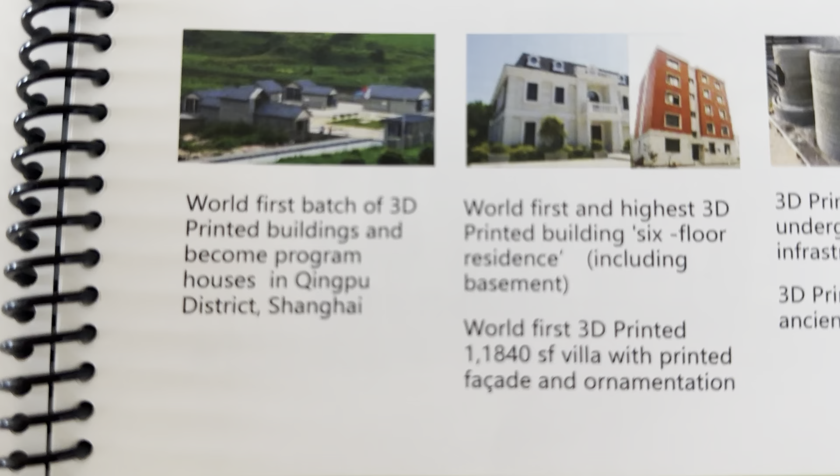Here's a brief introduction to the milestones of Winsun 3D printing projects: the world's first batch of 3D printed buildings, which became program houses in Qingpu District, Shanghai, and the world's first and highest 3D printed building, a 6-floor residence including a basement.

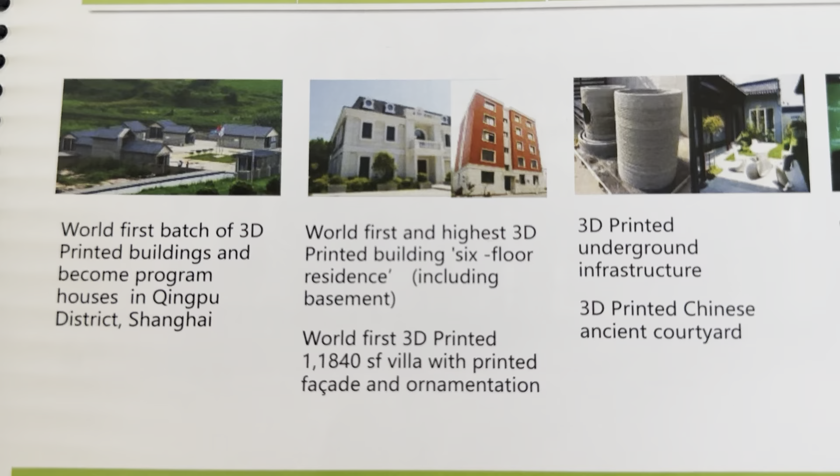World's first 3D printed 11,840 square foot villa with printed facade and ornamentation. Also, 3D printed underground infrastructure, and a 3D printed Chinese ancient courtyard.

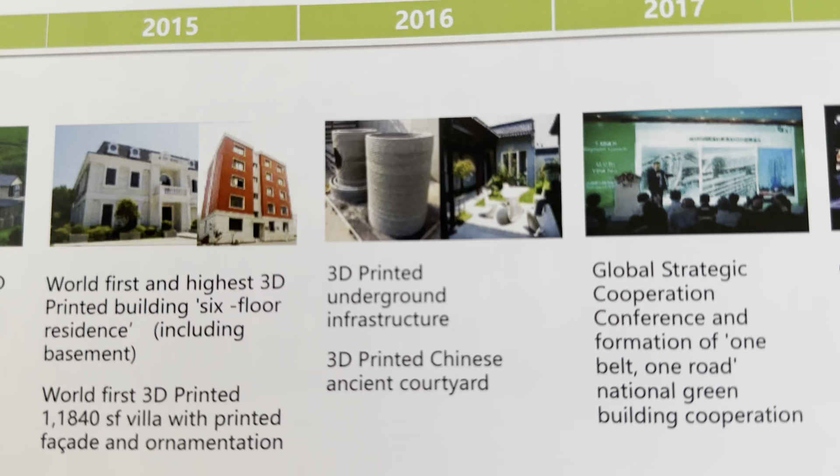In 2017, the Global Strategic Cooperation Conference and formation of One Belt, One Road National Green Building Cooperation. In 2018, Global 3D Printed Standards Shanghai.

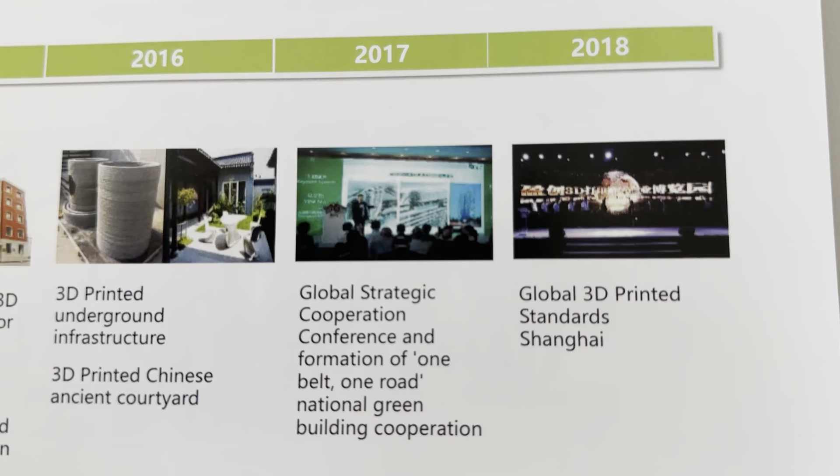In 2019, the 3D Printed Architecture International Standards League was established. Winsun's worldwide operations as of 2023 span 14 countries.

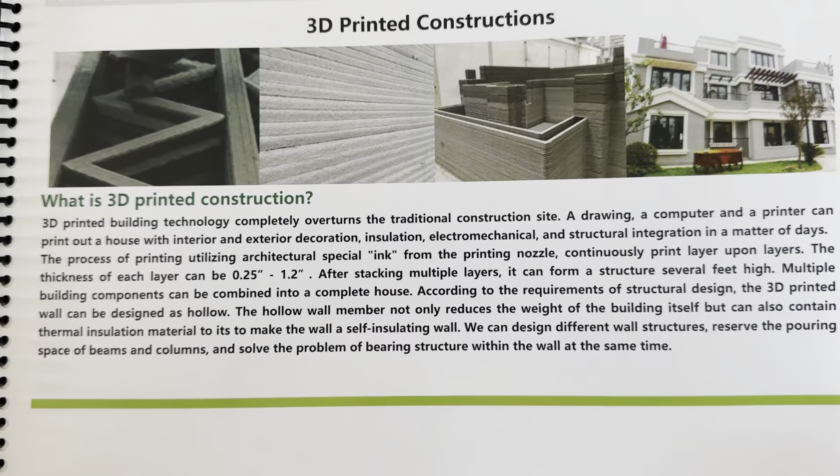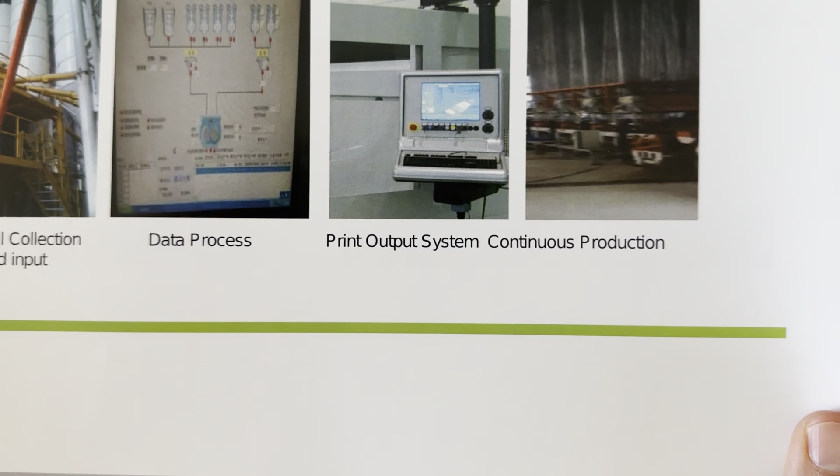Here are the 3D printed constructions. This is the first generation. This was the first to deploy a continuous 3D printer. And this is the second generation equipment.

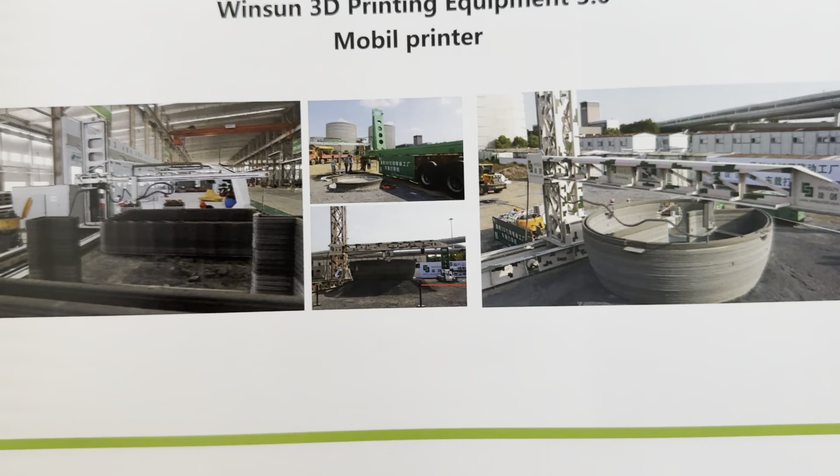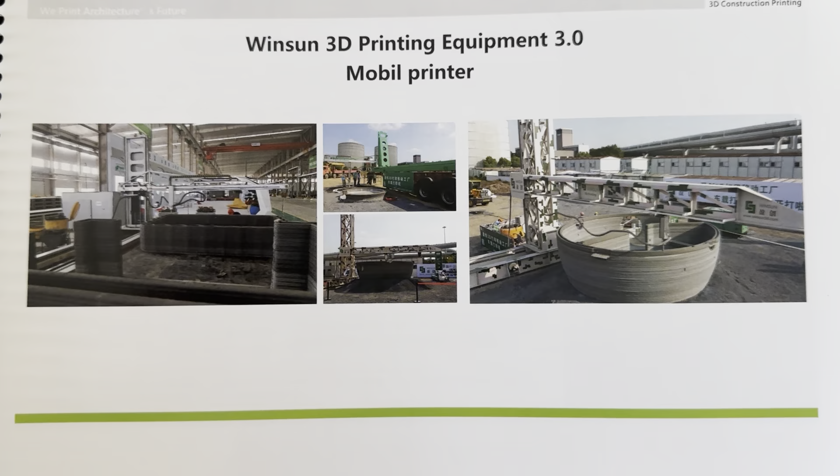The mobile printer, third generation of Winsun's 3D printing equipment. We actually have a fourth generation that can close and set up in each 30 minutes, and currently in the United States we have 6 of them.

We have 3 projects in Hesperia City currently being approved for 3D printing. One is a 7-unit apartment, 2-level building, and the other is a 9-unit single-family home.

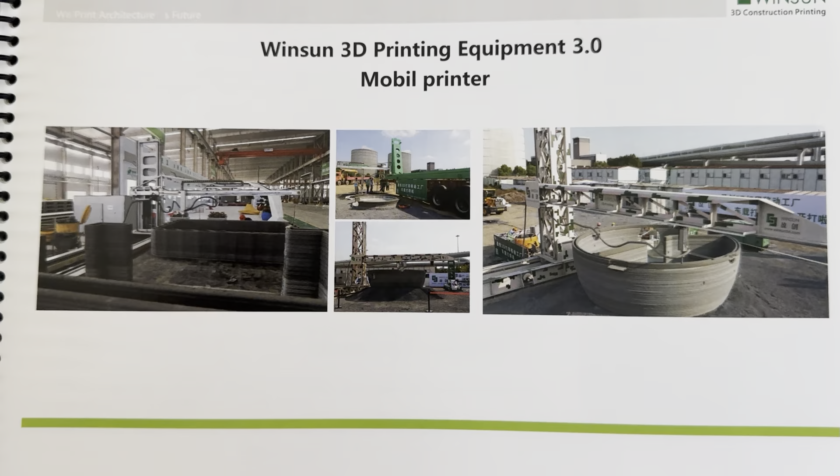Then there are the mini factories. Our 9th generation can print 10 stories and up, though it's not here yet. Winsun's 3D printing building is safe and reliable.

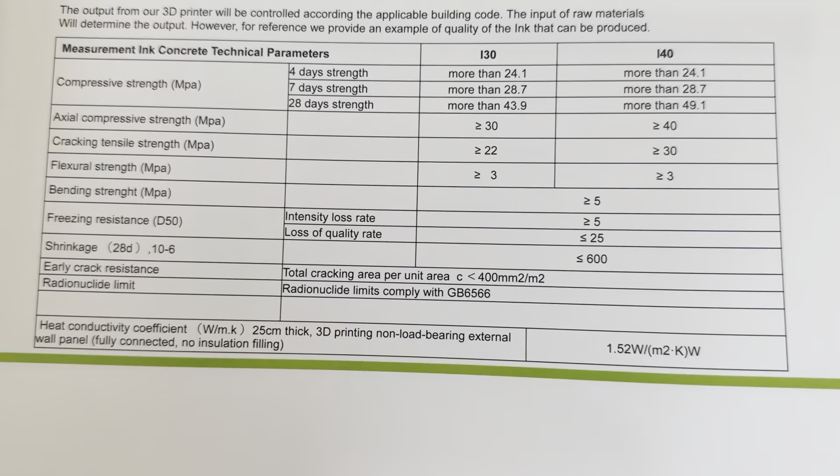It has been proven, and here are the standards.

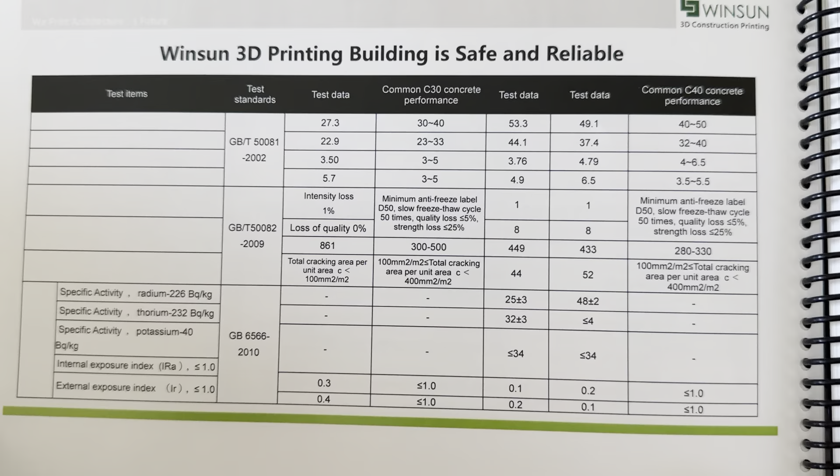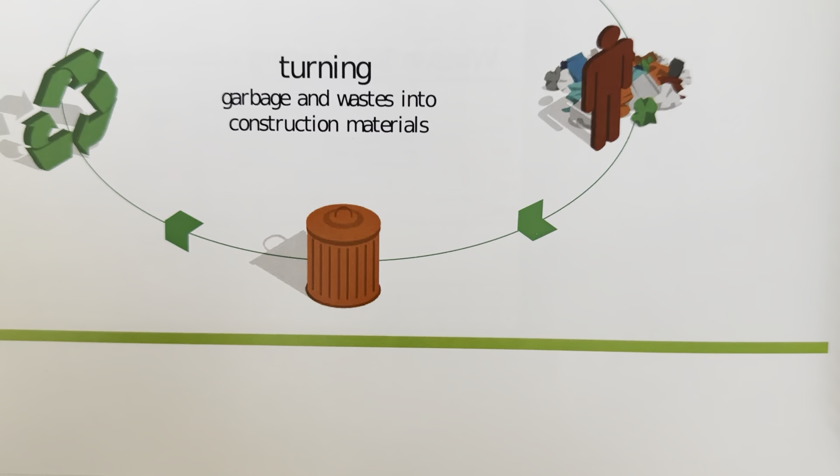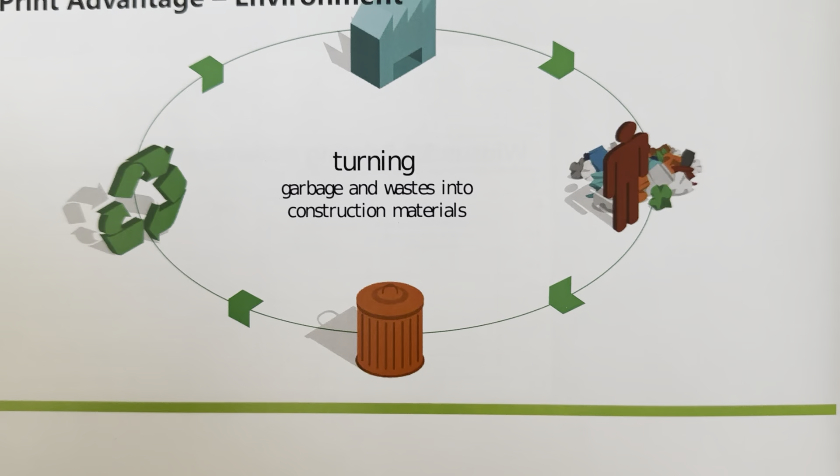The advantages of 3D printing for buildings: first is the environmental benefit. It turns garbage and waste into construction materials, recycling for a greener future—a building solution that turns construction waste and city garbage into an important part of the raw material of buildings.

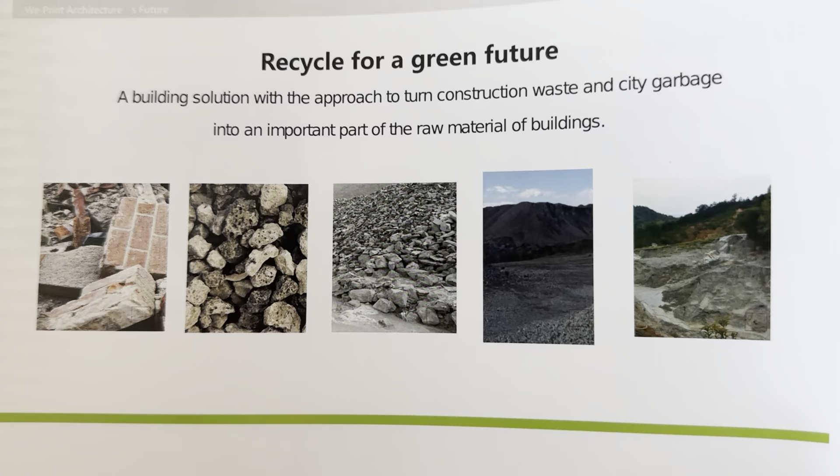Second is form-free construction. You know how in the traditional way we use wood framing? With 3D printing, we can eliminate that. It's custom-finished, and we can create any custom shape.

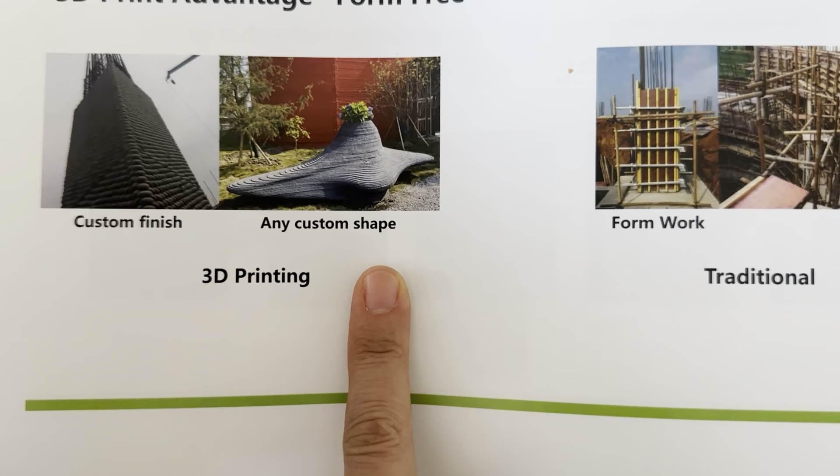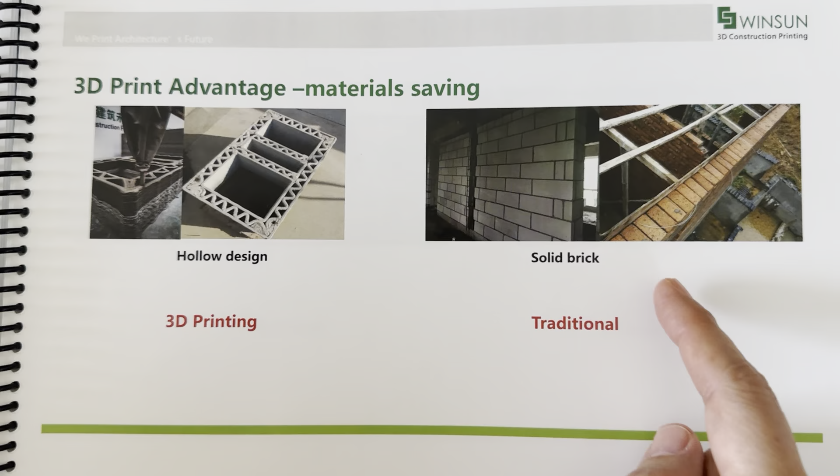The third advantage is material savings. Traditionally, if we use solid brick or poured concrete, it's solid. But with 3D printing, it's a hollow design.

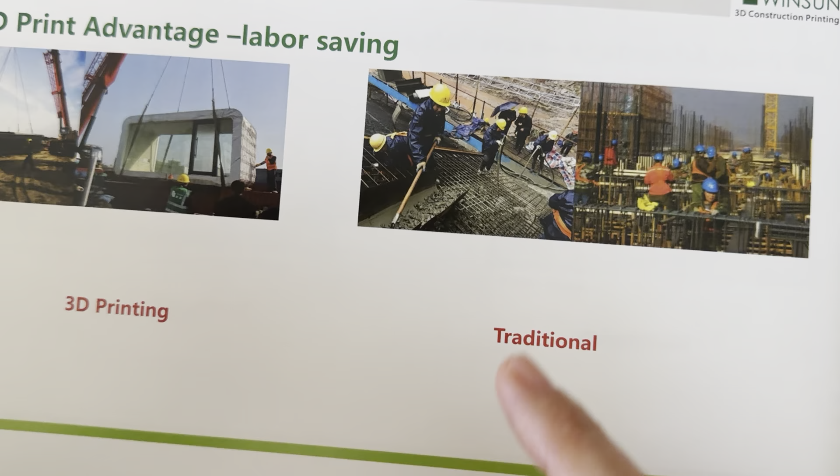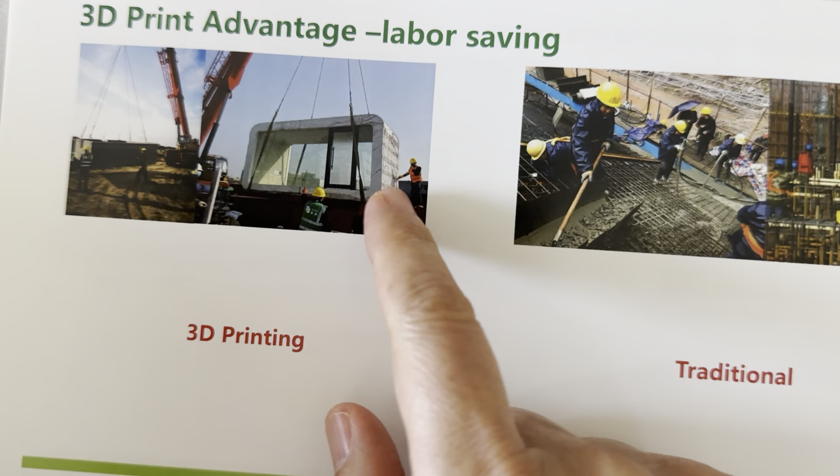And labor saving. It takes many workers for a big project to do the wood framing and pour the concrete. But with 3D printing, just one person controls the remote, with a few construction workers to watch the drop down.

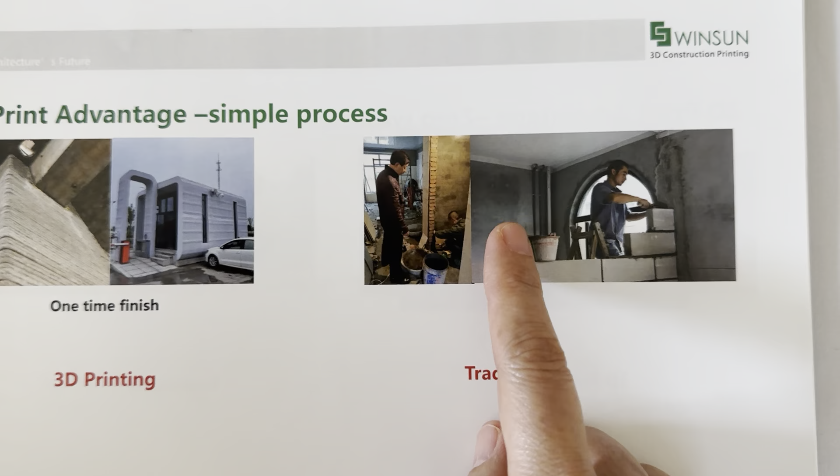3D printed advantage number 5 is simple process. Traditionally, we have people doing the work, but with 3D, it's one-time finish.

Number 6 is zero waste. 3D printing can turn any waste into building material. Traditionally, after we use a building and demolish it, the waste goes to the environment, but not with 3D. And it's time savings.

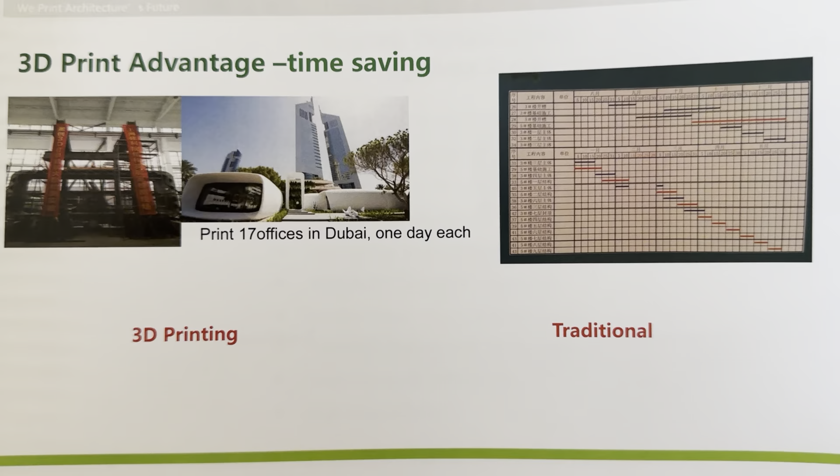We printed 17 offices in Dubai, 1 day each, so 17 days we finished. Traditionally, you have all these long timelines.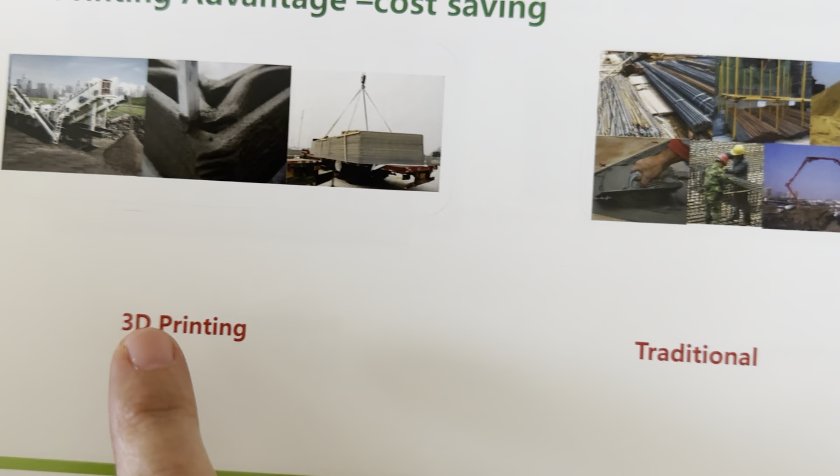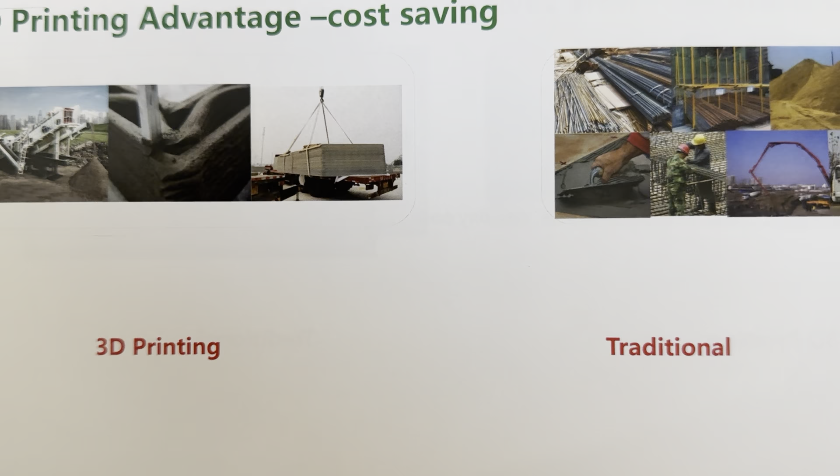Last but not least is cost savings. Traditionally, you have all this material cost, but with 3D, it's really simple. For a 1,000 square foot home, an ADU, 1 floor, it costs you less than $25,000 for the building structure, including material and labor, and it takes 1 day.

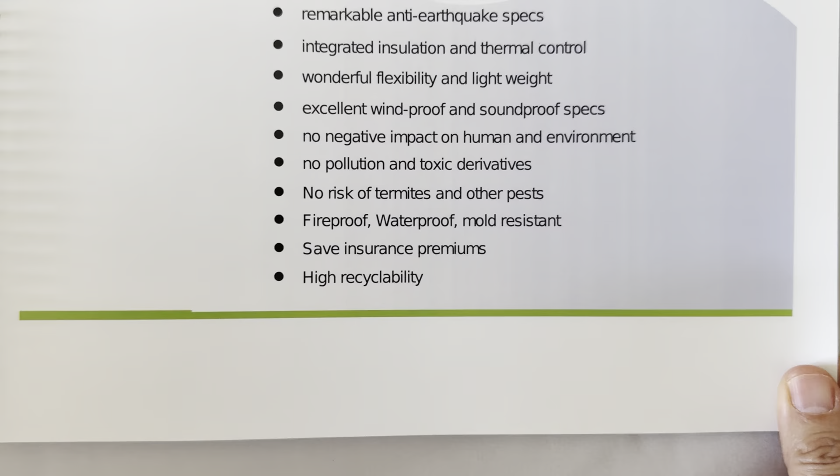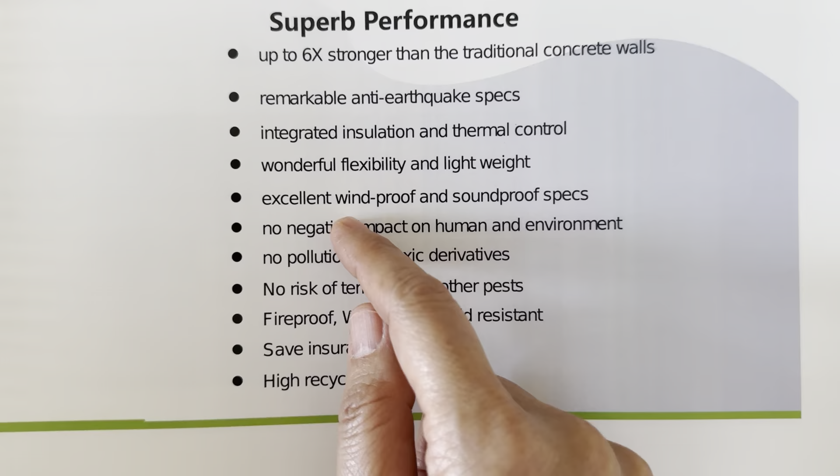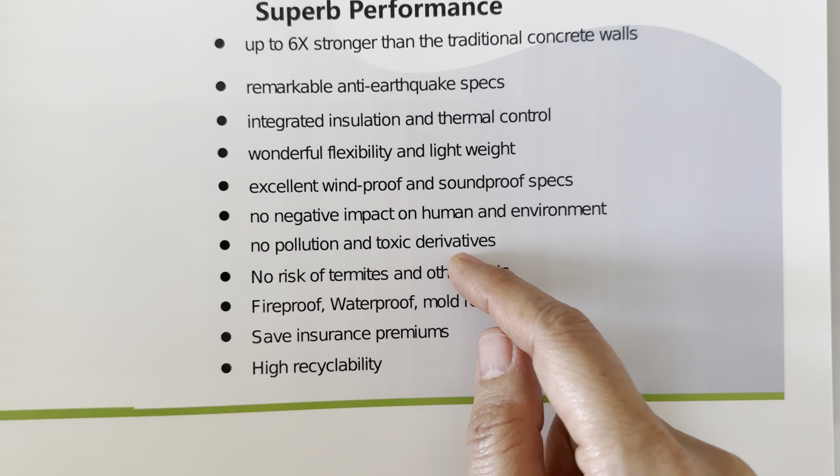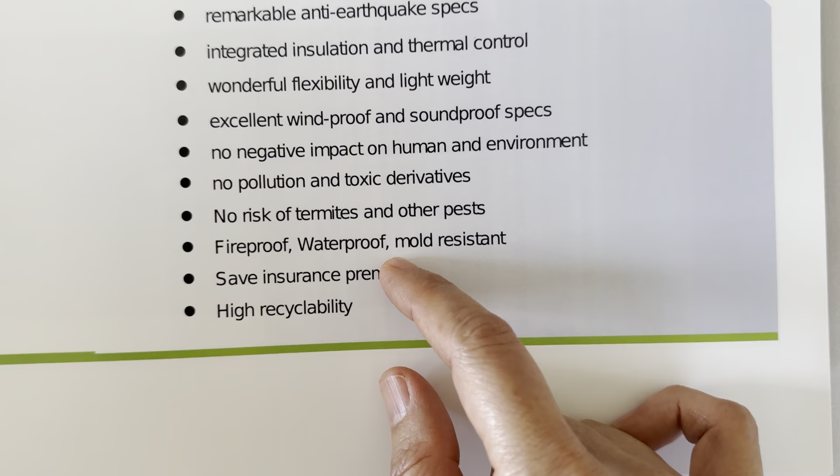So superb performance - it's up to 6 times stronger than traditional concrete walls. Remarkably anti-earthquake specs, integrated insulation and thermal control, wonderful flexibility and lightweight, excellent windproof and soundproof specs, no negative impact on humans and environment, no pollution and toxic derivatives, no risk of termites and other pests, fireproof, waterproof, mold resistant, save insurance premiums especially in California, and high recyclability.

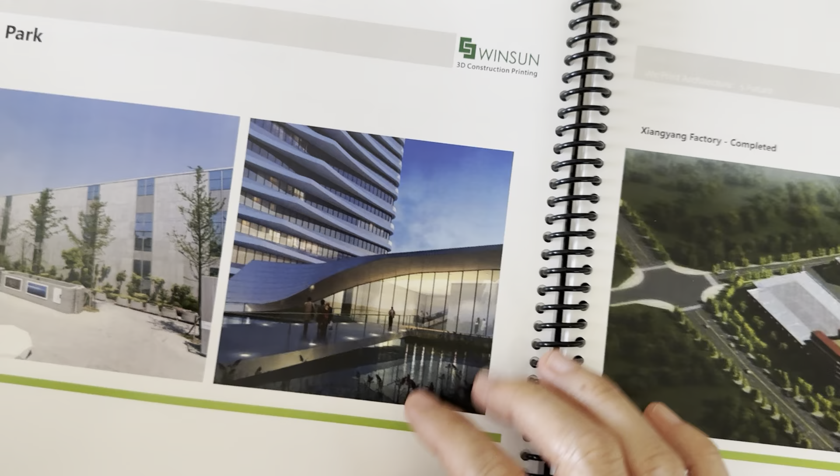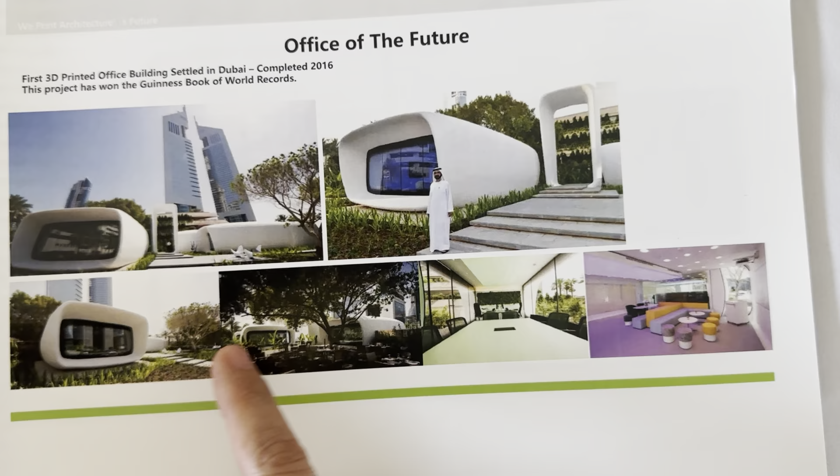Then we have the industrial park in Suzhou factory that's completed. And the Xiangyang factory, Winsun's industrial park, also completed. This is a Winsun printed park, also completed. And the Office of the Future in Dubai with Prime Minister Sheikh Mohammed in front of the 3D printed offices - we printed 17 of them in 17 days.

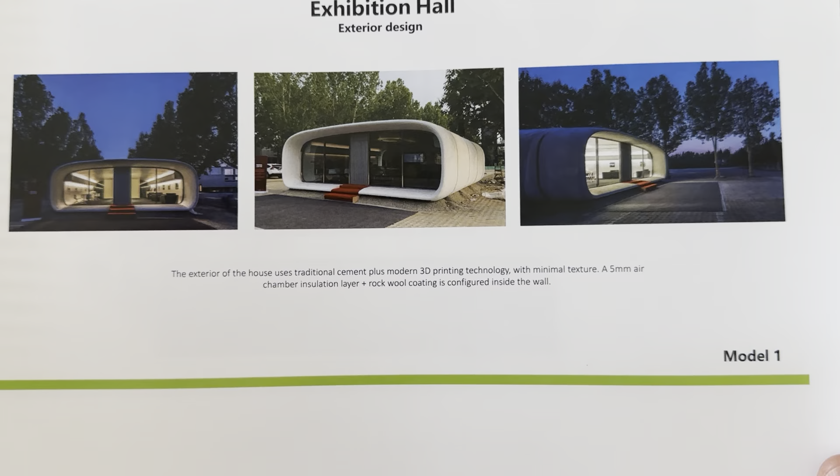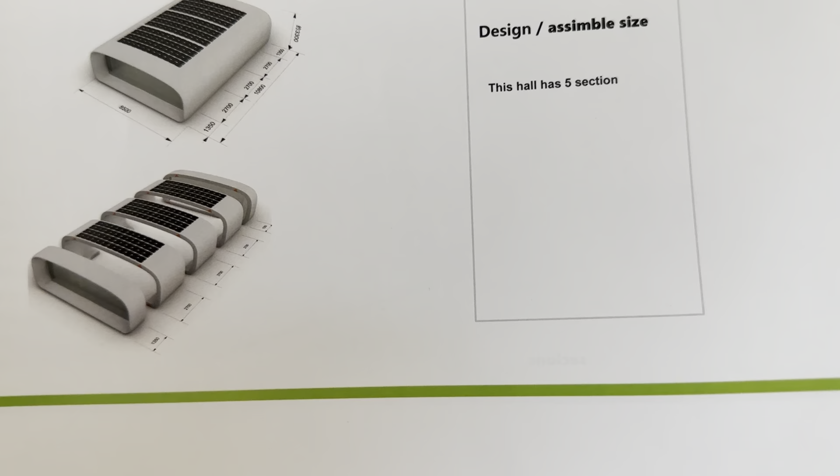And this is the dimension and how it was built, how it was printed. And the exhibition halls. Here you go. And solar panels on the top. Right here.

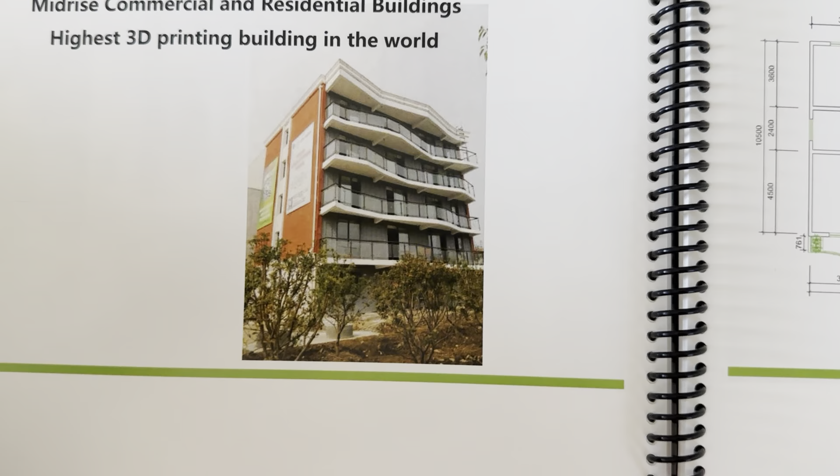And this mid-rise commercial and residential building, the highest 3D printed building in the world. And here are the floor plans.

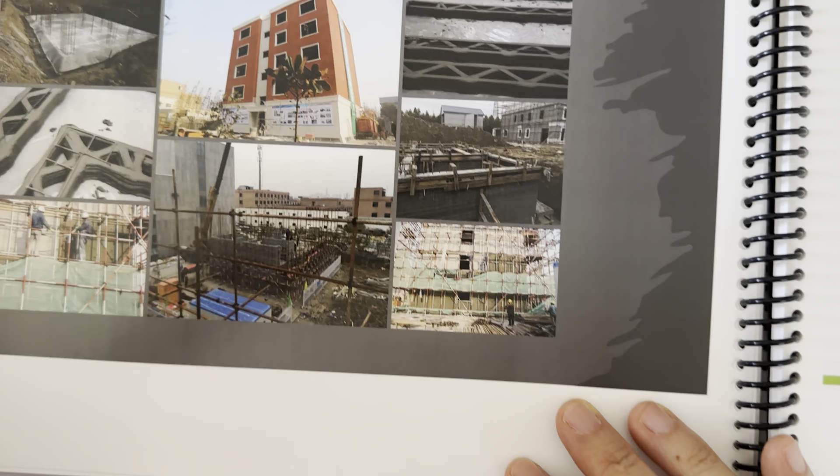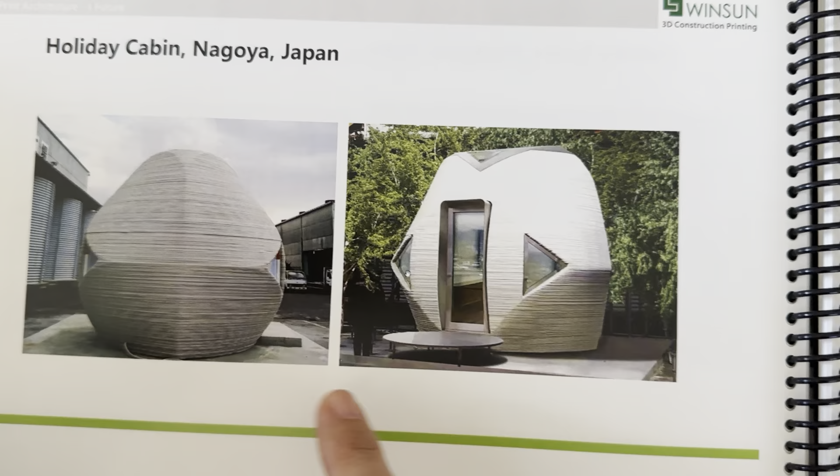Holiday cabin in Shanghai, China. We did this in Japan too - holiday cabins in Nagoya, Japan, and another one in Nagoya, Japan.

And in 2015, Milan World Expo, Winsun printed a KIP pavilion and UN garden. It's absolutely beautiful.

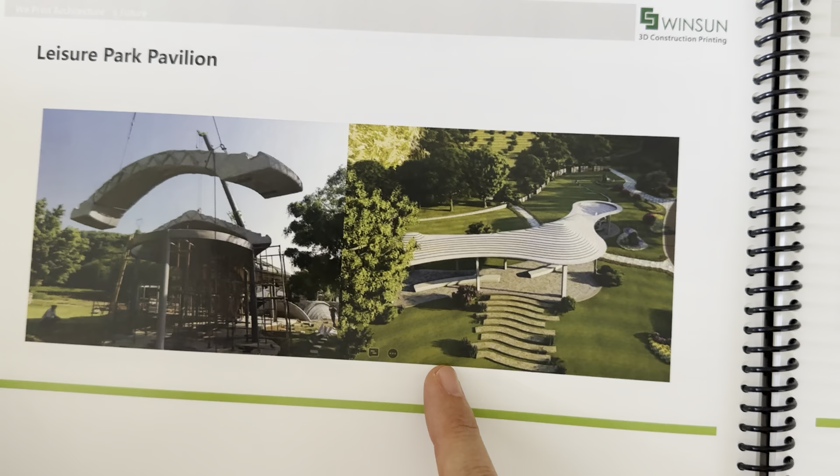Unbelievable - an APEC Summit wall system. We also printed a Leisure Park Pavilion, and a custom design unique office building.

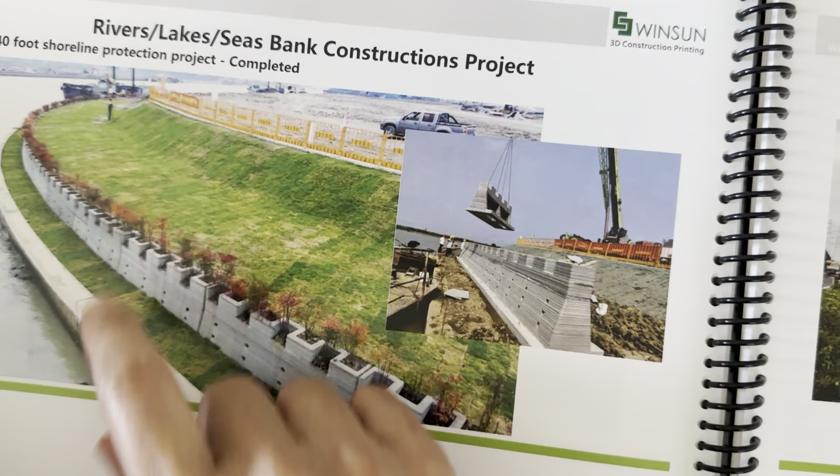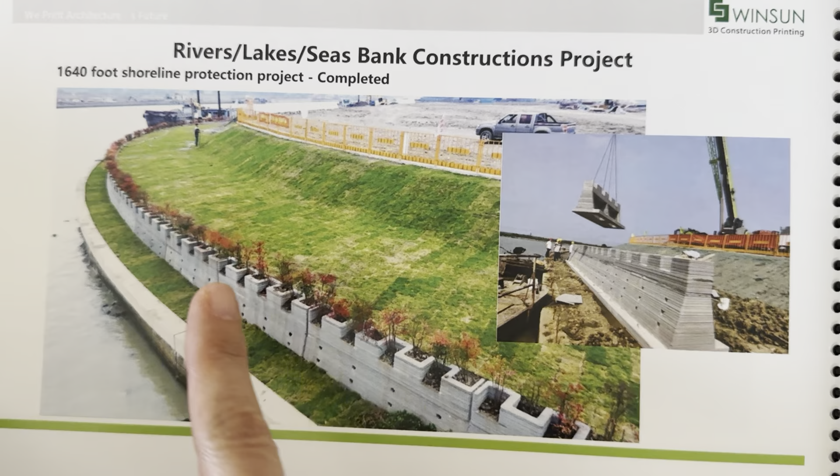Rivers, lakes, seas bank construction projects. A 1,640-foot shoreline protection project completed using 3D printing, and you hardly see workers there.

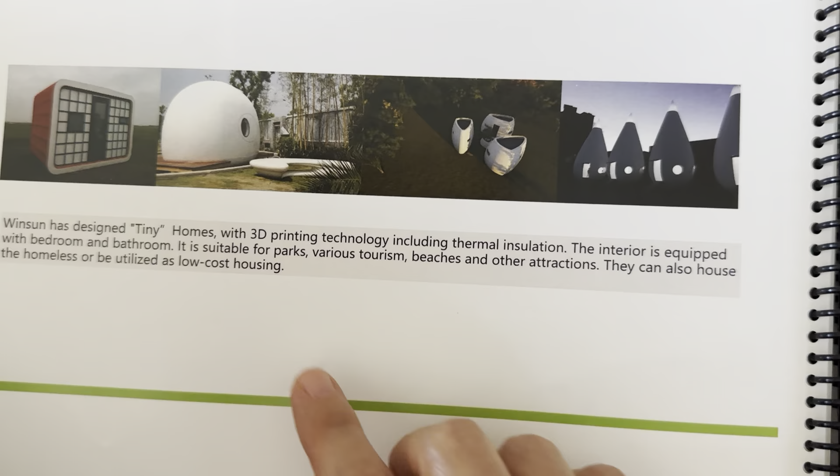Mr. Ma's, the legend's, dream is for everyone on earth to be able to afford to live in a beautiful home.

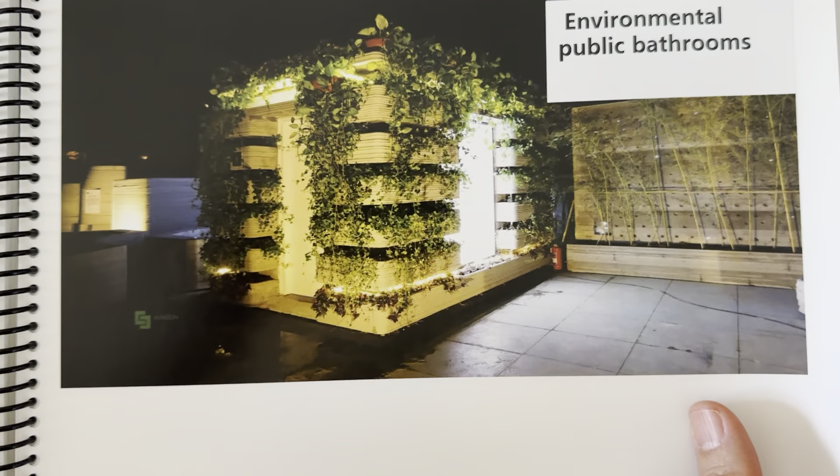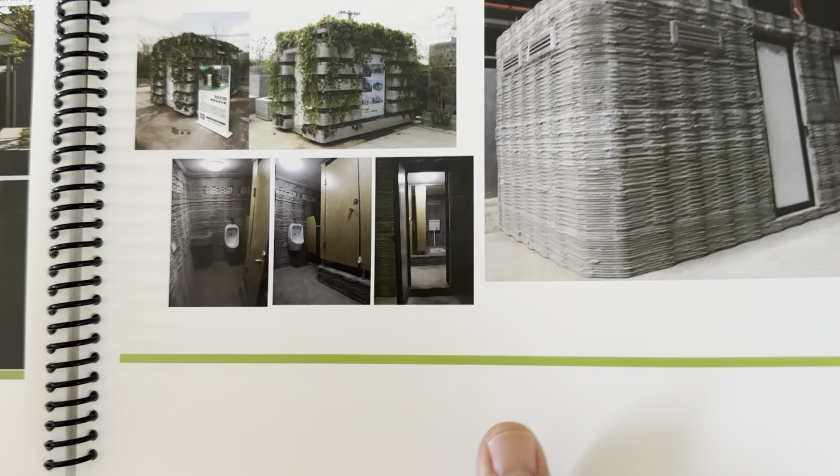And here's the environmental public bathrooms - it's all 3D printed. Wow, all 3D printed, and these are different ones and different designs, all 3D printed.

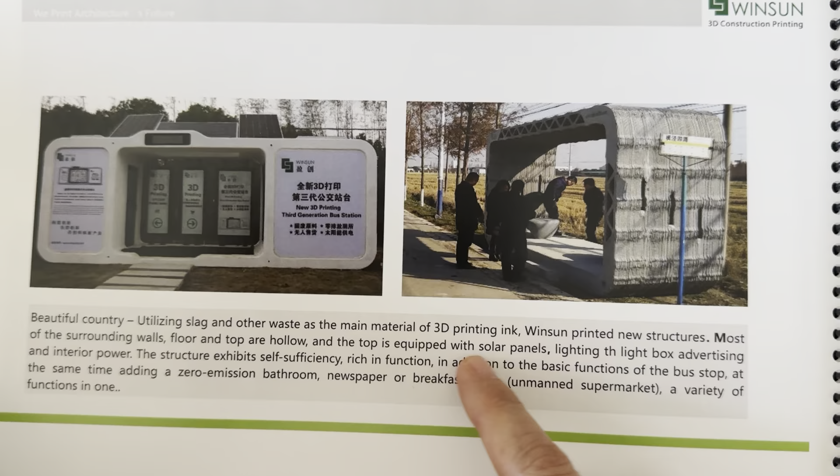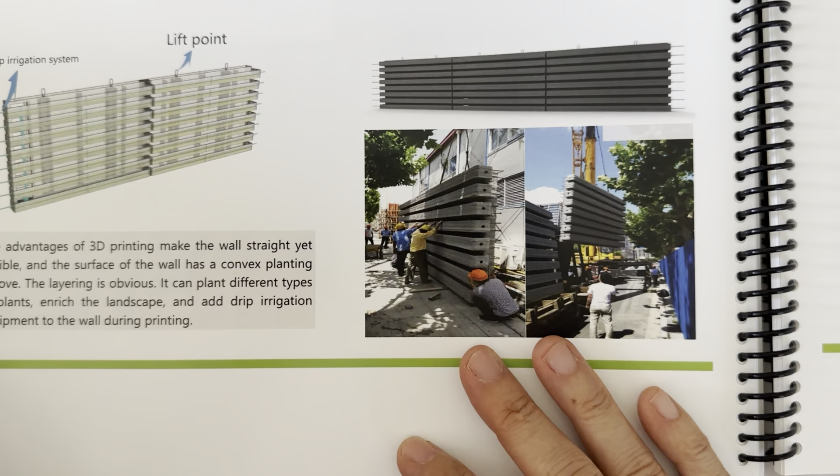And here is the bus station - this is how they print it. And the green walls, and the finished product of green walls.

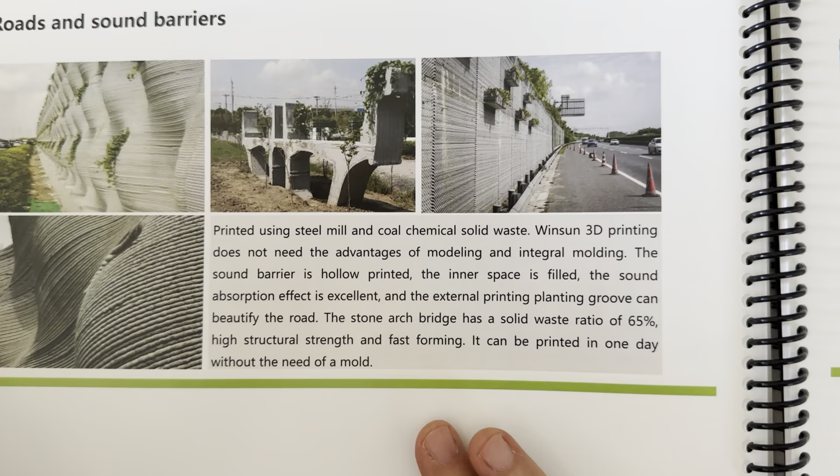Roads and sound barriers, and highway and road sound barriers.

Sign landscaping - signs and decoration, it's all 3D printed. Landscape lights, landscape flower beds, landscape bridges - we can 3D print those. And landscape seats, and flower pots.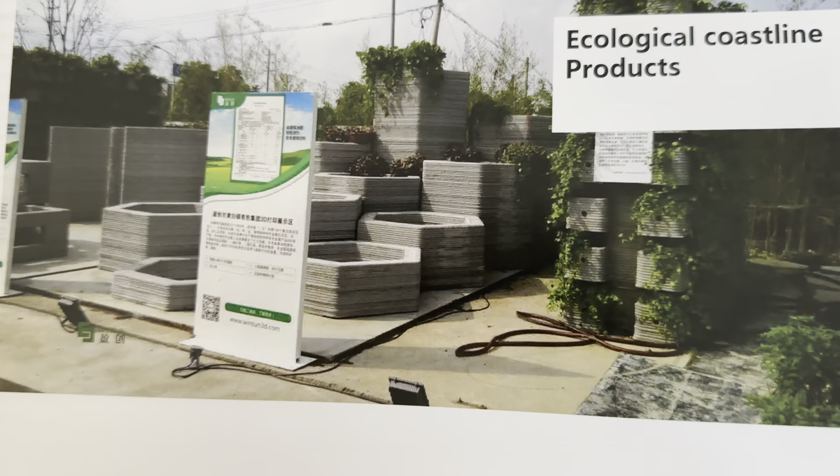Wow, look at this, it's so pretty. And then we have ecological coastline products as well.

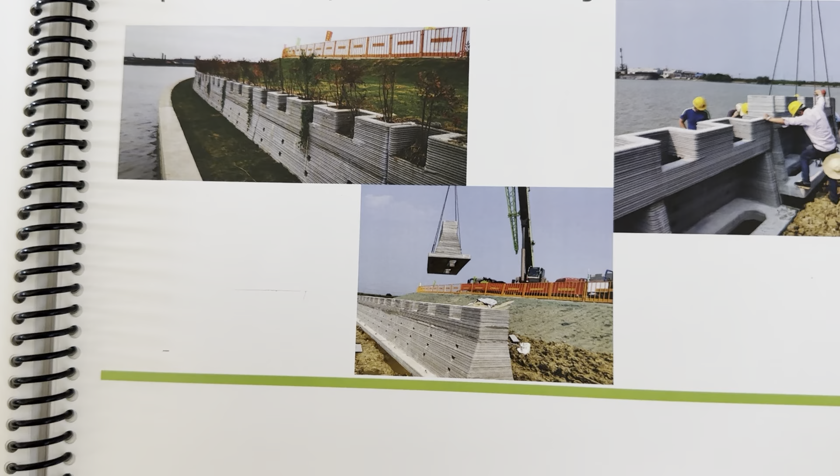Get this - printed coastline, riverbank line, retaining walls, and dry construction system parts.

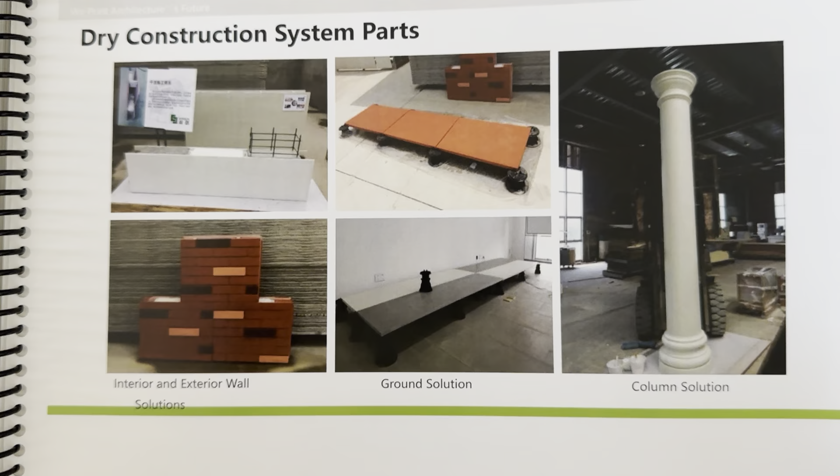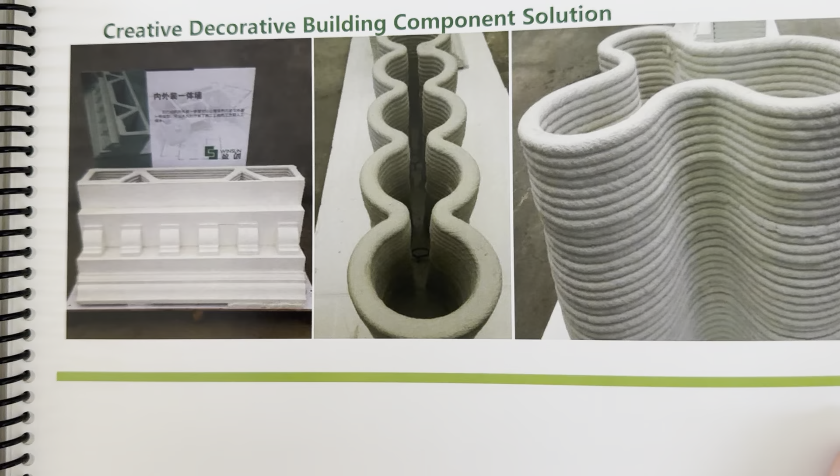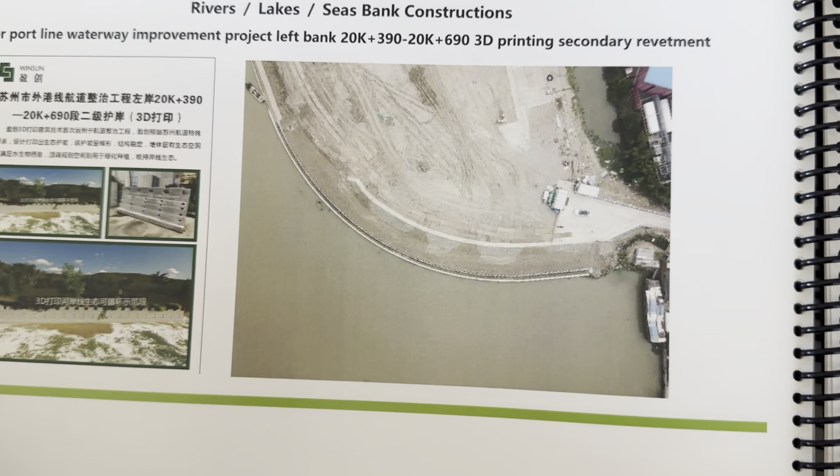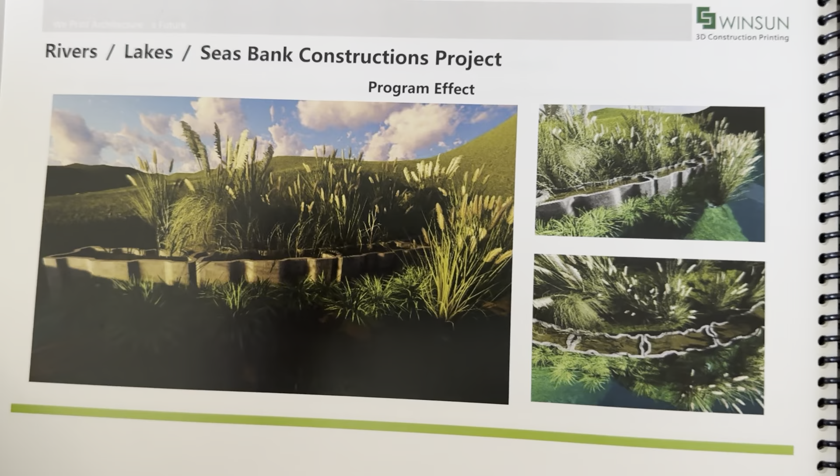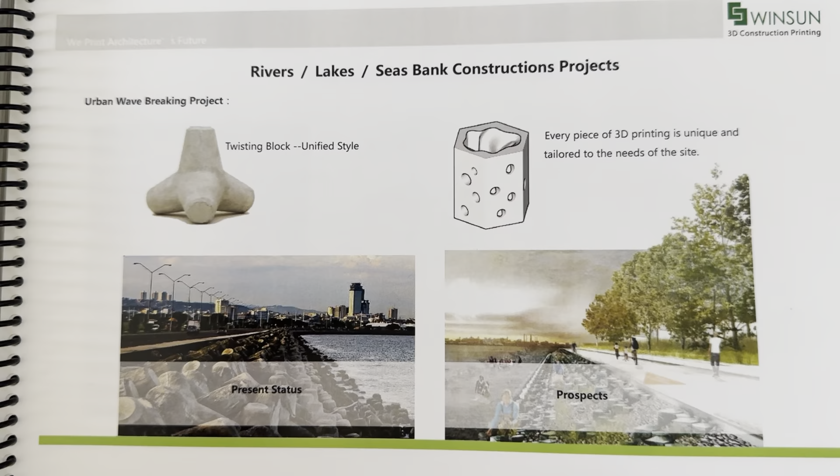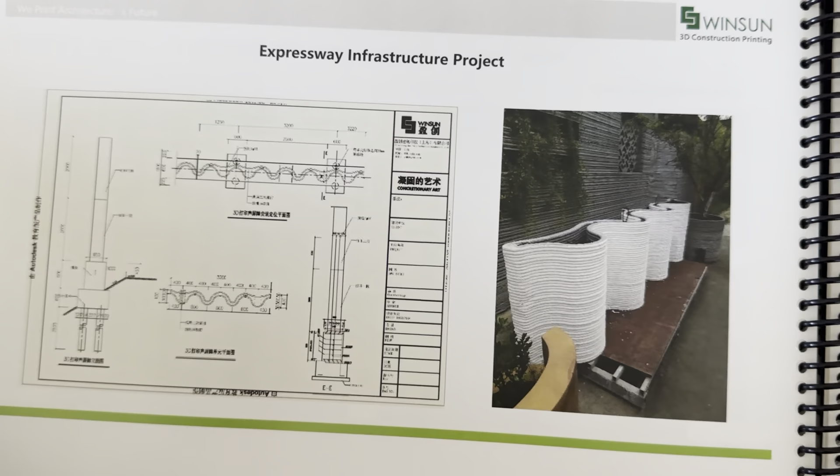In the United States, we haven't seen that yet, but we are here because the founder created another company in the United States since November last year when he moved to the United States. He received the EB-1A visa in May, and that's when his first 3 projects got approved by the Hesperia City for the 3D printing expressway infrastructure project.

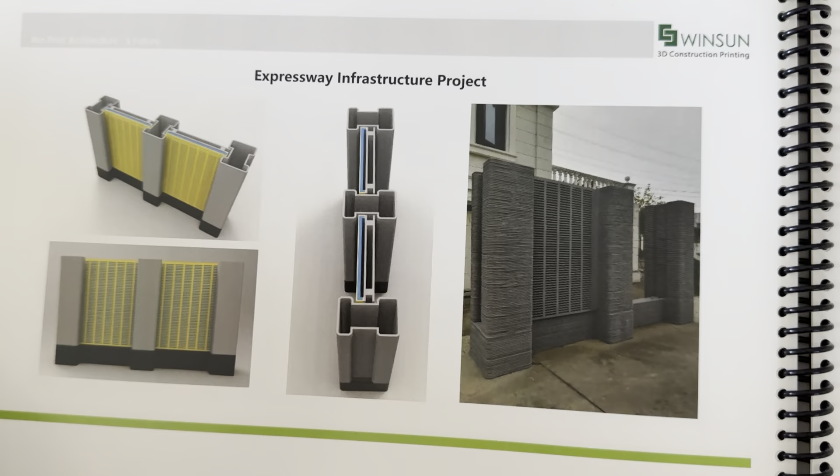And of course, these are in China. And the wall connection - how he did it. Here are the wall connections. My gosh, suspended floor.

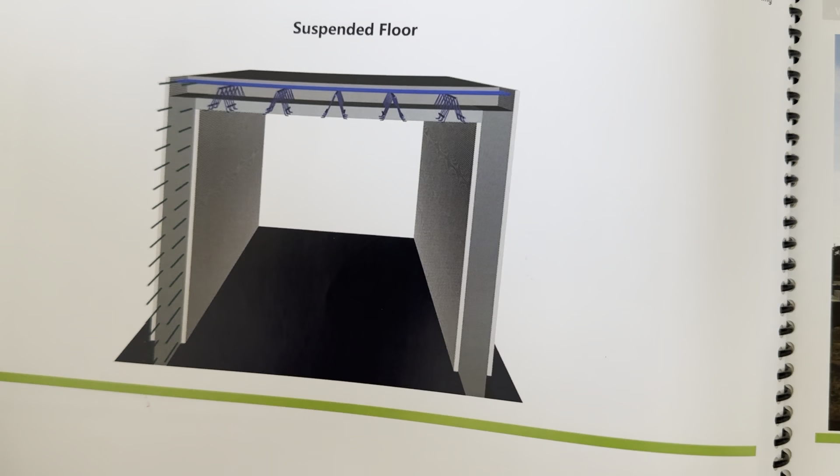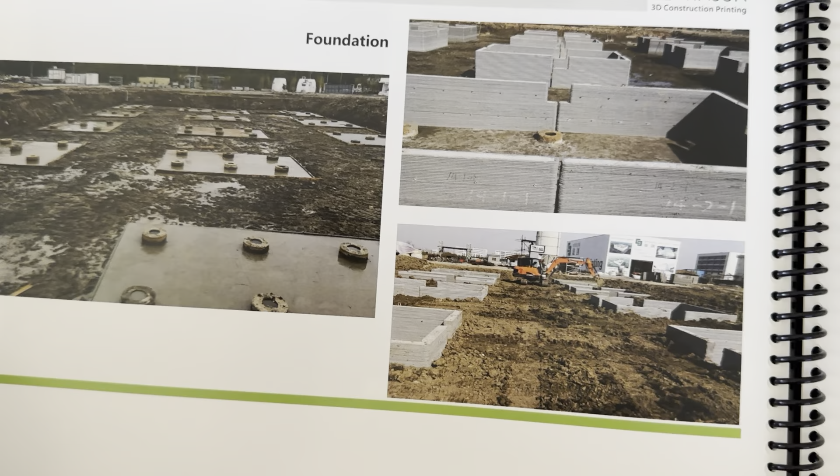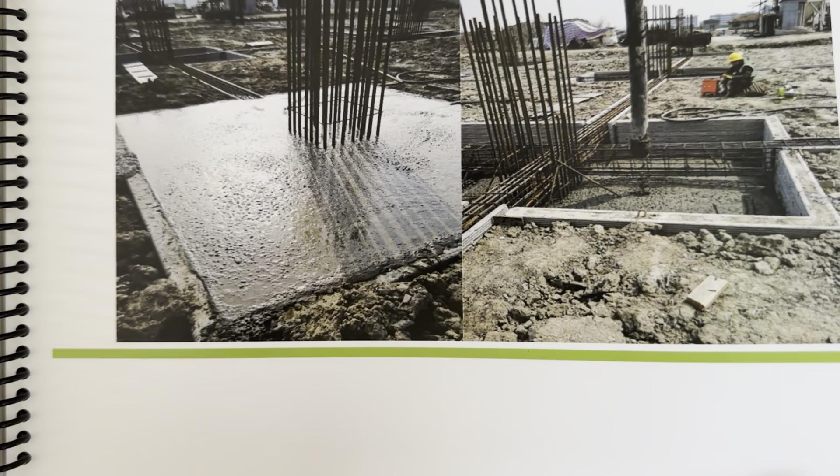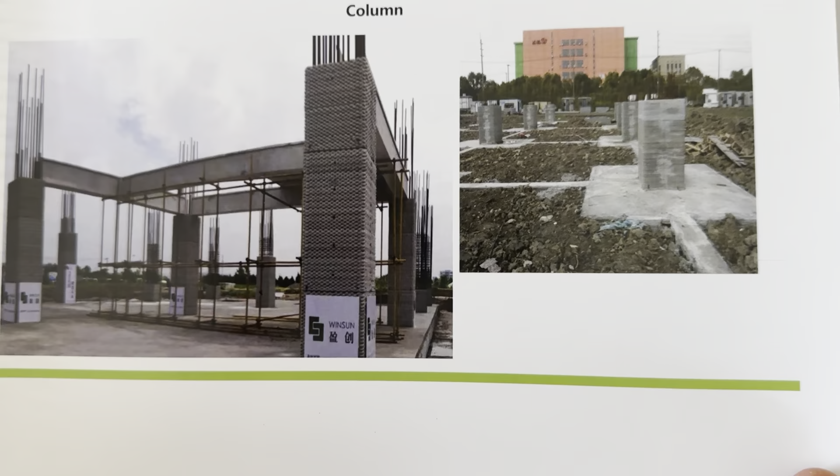And the foundation - this is how it was done. Look at this, this is all foundation. Column - here are the columns. And that's it.